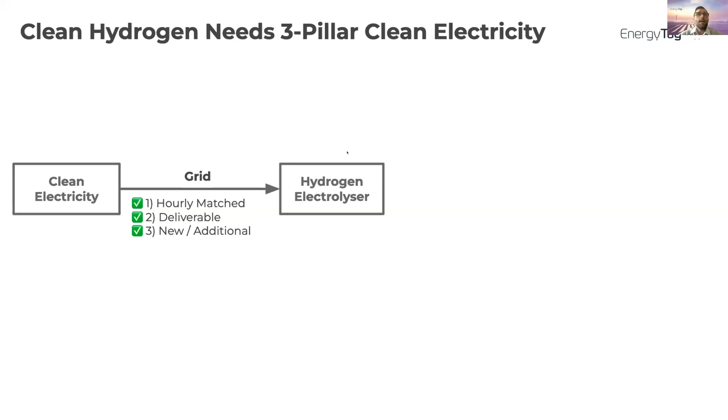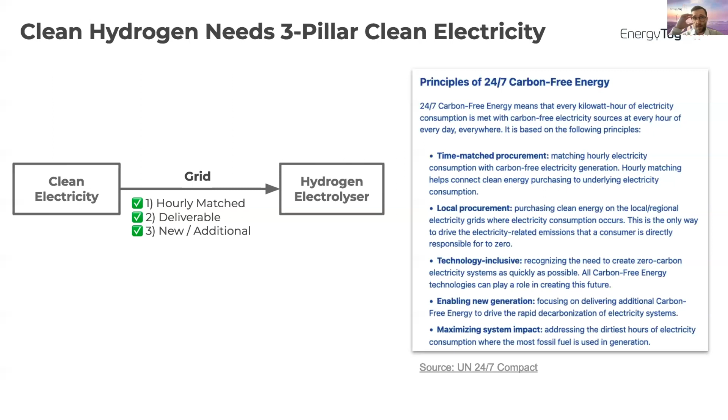First of all, as has been mentioned already, there are the three pillars: grid-connected electrolysis, hourly matching, deliverability, backed up by new or additional supply. This is obviously very much aligned with the principles of the 24/7 compact, of which Energy Tag is one of the members. This is the fundamental basis of really clean electricity when there's new load like hydrogen coming onto the grid, and the experts will cover in detail why this is important from an emissions perspective later on.

Just to give an overview of what's going on around the world, this is not just a topic in the United States. It's very much a global topic anywhere where hydrogen is going to be produced at large scale. The EU will be three-pillar hydrogen after a transition phase by 2030. All renewable hydrogen produced and imported into Europe will have to meet these three criteria, and that sets a first international standard for what it means to be truly renewable hydrogen. There is a transition phase to the hourly tracking, out to 2030.

That's a bit unfortunate, but it's for a number of reasons, including the fact that the EU's legislation for hourly tracking actually needs to be changed and amended, and that will take a bit of time. The United States has no such regulatory block. It's really important - in the US this can happen more or less today. Deviations in the United States would be more serious, as the US has no carbon price at a federal level, has less clean grids in general, and a larger subsidy for hydrogen.

A couple of points around after the European rules were announced: Hydrogen Europe, which represents the EU hydrogen industry, said the rules can be met. They're strict, but they can be met. That's in their public statements after the release of the Delegated Act.

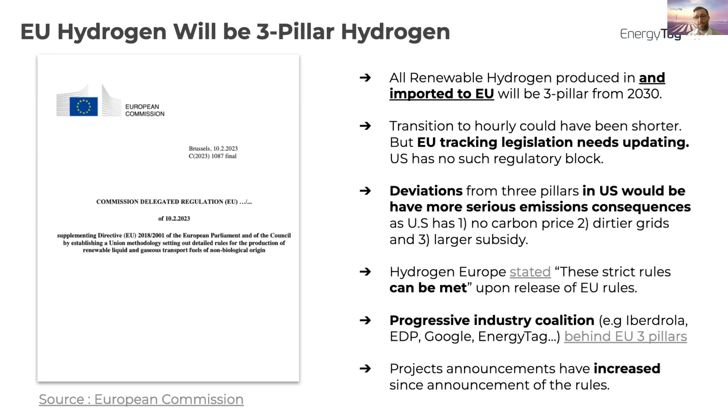We were part of helping put together a progressive industry coalition in Europe with the likes of Iberdrola, EDP, and Google, who asked for these three pillars to secure the role of hydrogen in a European energy future. Actually, project announcements have increased since the release of this delegated act, a sign that this can happen absolutely, and this can be done in practice.

Just to take a step back and more broadly, the 24/7 movement is actually something much broader than the hydrogen sector, even if that's a great initial example. Governments like the US government have a 24/7 target for their energy procurement, and the UK's hydrogen standard is requiring 24/7. Other governments around the world are implementing regulations using this approach.

Energy experts have many models out there showing this is the best way forward for grid decarbonization and defining clean energy, from the IEA, Princeton, who are here today, and TU Berlin. A number of civil society organizations have signed letters, both in the US, like the NRDC on the call today, and in the European Union, calling for 3-pillar clean hydrogen. That's a really important voice, as they want to make sure the hydrogen we produce is clean with no shortcuts taken. System operators in Europe have also called for this approach to better decarbonize our grids.

And obviously there's the compact. I don't probably need to explain that, but there's 118 companies who've signed up to the principles introduced on the last slide. Just in terms of feasibility, maybe to touch on my own experience in the sector.

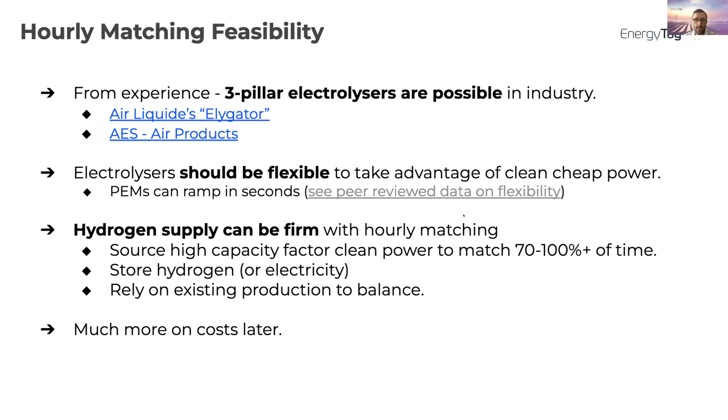So I think that's also a key point to keep in mind - we can do the tracking right. And in the US, which is more the focus of today's conversation, even if the principles apply globally, hourly RECs are required for that tracking. Renewable energy certificates are already available across the US. Providers like M-RETs and PJM GATS are already offering this service today, and therefore can offer it straight away for hydrogen as well, as long as the hourly data is provided by the production and consumption devices. EnergyTag has a voluntary standard for hourly tracking and can help harmonize approaches in the United States if required.

So that is it from me. I hope it's been a useful introduction, and I'll pass it back to Irina.

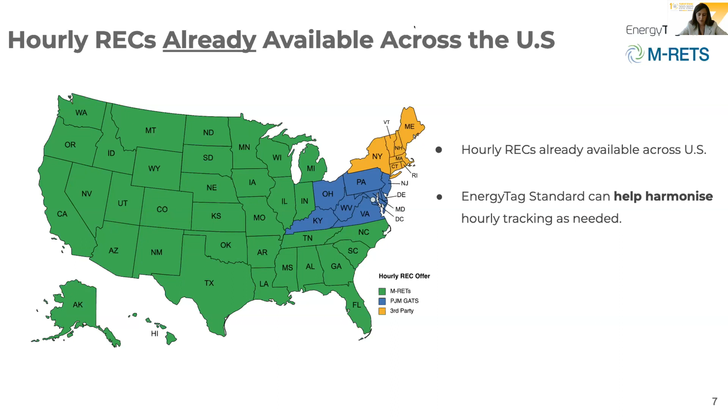Thank you very much, Kilian. Very useful indeed. I think you gave a very good overview at global level, focusing on the inclusion of the elements as we discussed in the regulatory framework, looking into feasibility and also the real possibility of tracking at an hourly basis around the globe. Thank you so much for that.

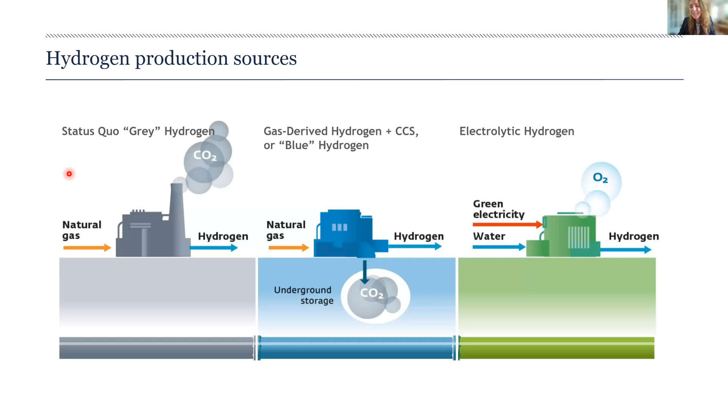And as we'll cover, this can actually be far dirtier than this without any strong regulations around how it's produced.

So this is where the clean hydrogen tax credit comes in. This was part of the Inflation Reduction Act, which passed Congress in the US in August. This is the largest climate bill in US history, offering roughly $400 billion in support and subsidies for clean energy solutions, set to take us much closer to our US climate goals now that it's passed. Hydrogen was very well taken care of in this policy, and the clean hydrogen tax credit is one of the larger subsidies in that package.

It is based on the greenhouse gas emissions of hydrogen production, meant to subsidize two pathways: electrolytic, based on water, and the carbon capture one, which is blue hydrogen. Those are the emissions of today's status quo gas-derived hydrogen. As long as a project is 60% or more cleaner than today's hydrogen, they start getting subsidized by receiving a tax credit for every kilogram of hydrogen produced. The cleaner a hydrogen project is, the higher the subsidy.

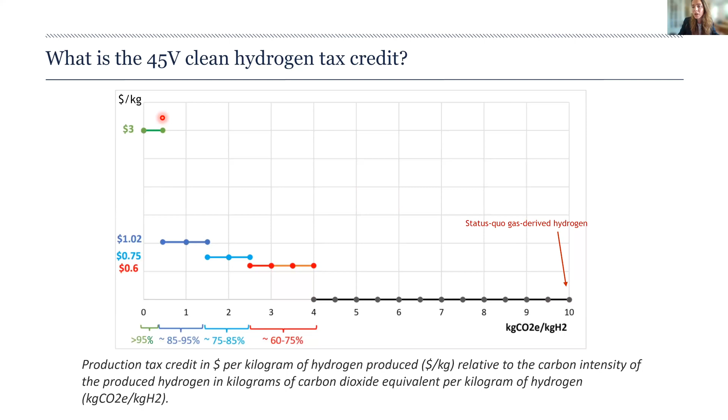The top prize is the $3 per kilogram subsidy, only eligible for very, very clean projects, 95% or more cleaner than today's hydrogen. You can see that jump from roughly 94% to 95% or more. This is exactly what Congress wanted—to subsidize those truly very clean projects, because those are the only ones really aligned with climate goals. This is a substantial subsidy and it's very long-lived.

First of all, it's uncapped, so there's no limit to how big it can be. It can be more than $100 billion over its lifetime, if not more. Just to give you a sense of what that means for one project: there's a big project in Texas being announced to produce hydrogen from water and electricity. This project alone would be eligible for $3 billion of subsidies from the federal government. This is enormous as one subsidy for one project.

It's very long-lived—eligible for projects that commence construction as far as 2032, and it lasts for 10 years, which means that you can still have hydrogen projects by 2045 still being subsidized by this bill.

As I mentioned, the implications really hinge on how the US federal agencies—Treasury being in the driver's seat, but also supported by the Department of Energy, the Environmental Protection Agency, and the White House—will implement this credit. Because the credit is tied to the greenhouse gas emissions of hydrogen production, Treasury is tasked to determine a methodology or issue guidance for calculating the life cycle greenhouse gas emissions of hydrogen within 1 year of the passage of the IRA. All federal agencies are closely engaged with Treasury considering the complexity of the issue.

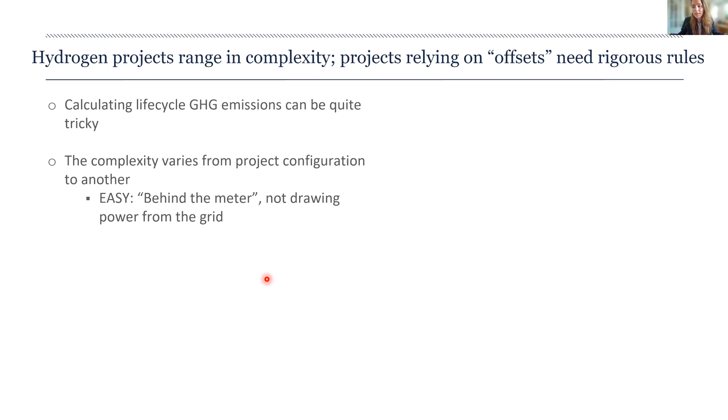I will briefly touch on the crux of the fight in terms of complexity, but Wilson and Dan will cover this more rigorously. The complexity of calculating greenhouse gas emissions varies by project configuration. If you have a hydrogen project that's not connected to the grid, only connected to a wind or solar farm producing hydrogen on site, that's easy—that clearly has zero emissions. However, it gets much more complicated for projects connected to the grid, drawing a lot of grid power that is still very fossil heavy in the US.

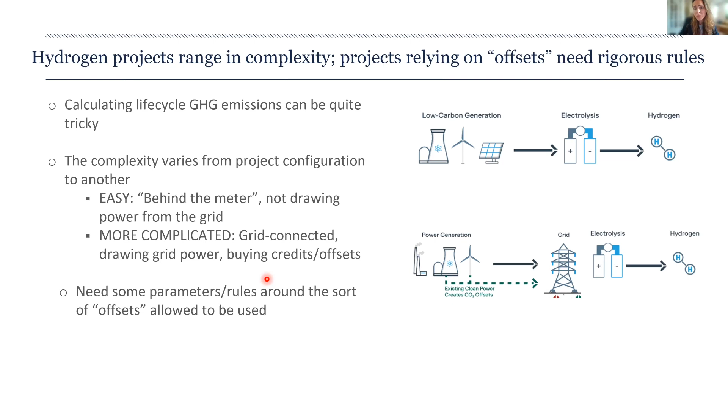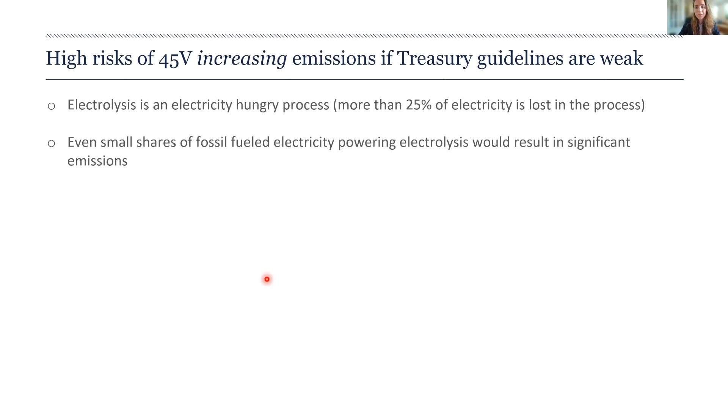So producing a lot of emissions and just purchasing credits or offsets to net out those emissions. As many of you probably know, offsets are a very tricky topic because it's very hard to make sure they're actually effective at reducing emissions. So we need some parameters, conditions, or rules around the sort of offsets allowed to be used to claim the credit—this is where the pillars come in. This is especially true for electrolysis, which is a very electricity hungry process. More than 25% of electricity is lost to produce hydrogen, meaning even very small shares of fossil fuels in the electricity used to power the electrolyzer can result in very significant emissions.

Just to give you a sense of how perverse an impact we may have if the rules aren't strict enough, this graph shows the carbon intensity of various hydrogen projects. This is where status quo hydrogen is today. This is hydrogen produced from water but powered by today's US average grid - it's twice as bad. This is electrolytic hydrogen powered by coal electricity, four times as bad.

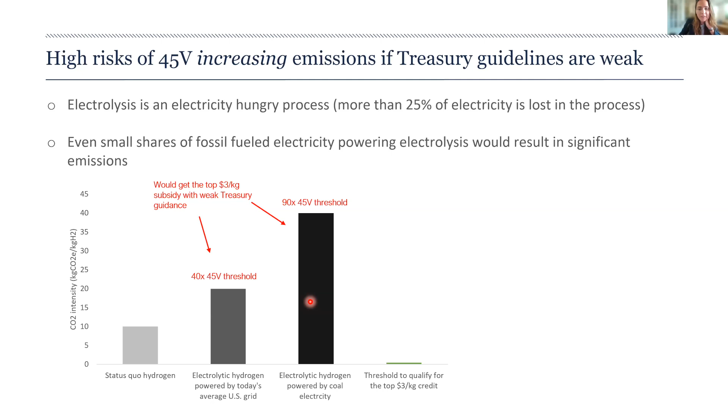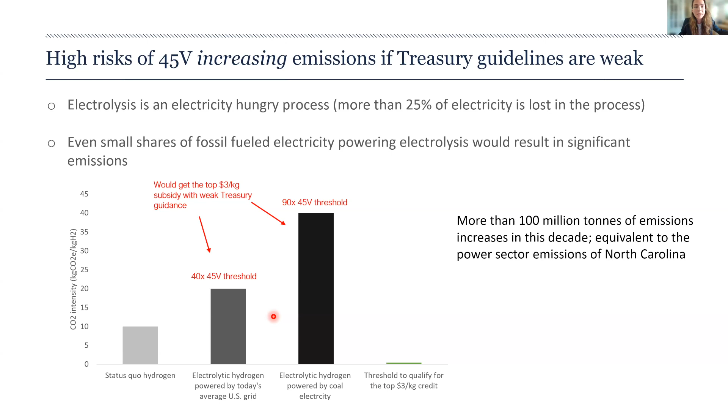That is the threshold to qualify for the top subsidy. Both of those can actually receive the subsidy if Treasury rules are weak and don't rely on the pillars. So we can have a very perverse effect where the US taxpayer is subsidizing projects worse than status quo, and this will result in a lot of emissions total, more than 100 million metric tons. We've seen much higher estimates.

And again, this is where the three pillars come in. They're the parameters, conditions around those offsets to make sure that hydrogen emissions being produced are actually effectively being netted out. As Wilson and Dan will describe, this is the only system that ensures truly clean hydrogen as the IRA intended.

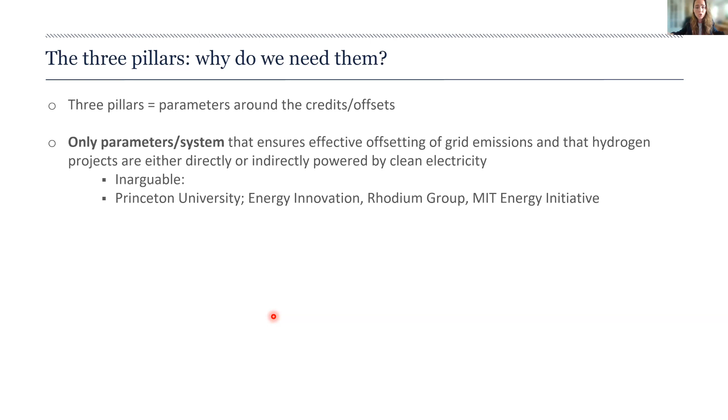I will not go into this too much, but I love including it because NRDC is primarily a lawyers-heavy organization, and they produced an excellent legal explanation of why the three pillars are necessary to meet IRA requirements. I'll describe it simply: the IRA defines clean hydrogen by accounting for the impacts it will have on the system. So if a hydrogen project spurs fossil fuels on the system via weak Treasury rules, then those emissions have to be accounted for. And since the three pillars are the only system that will enable emissions to be truly very low, then they're legally necessary to meet IRA requirements, the way the IRA defines the boundaries.

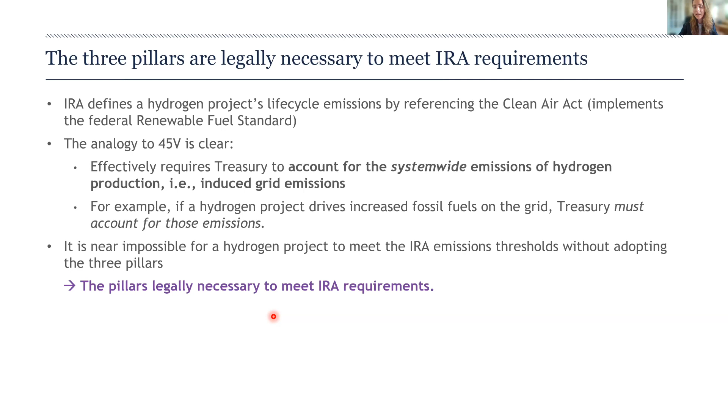So we're happy to chat more about that, but I will skip it.

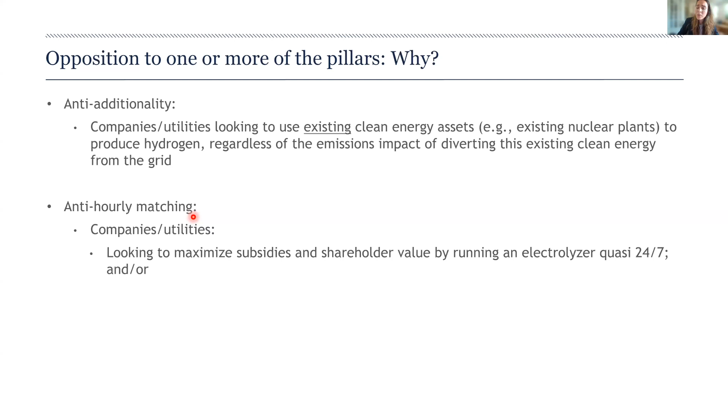On the grid, we have the anti-hourly matching companies, largely companies either looking to maximize subsidies and profits by running their electrolyzer quasi 24/7, which may not happen under hourly matching since you're more tied to the generation of renewable energy - and you're all fairly aware of that in this compact - or have a business model or are located in a region where hourly matching may not pencil out at today's electrolyzer costs. The question that really needs to be raised is: is the intent of a tax credit to make this work for everyone, everywhere, regardless of whether that's aligned with our climate goals, or is it meant to support the industry sufficiently to make it more widespread and let the market take it from there?

And this is the crux of the fight here.

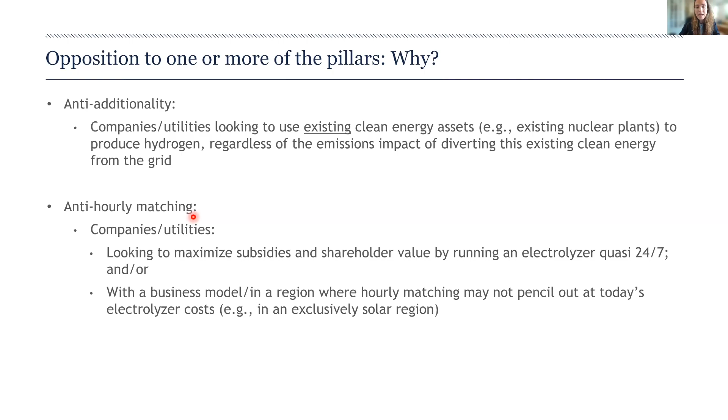That was very comprehensive and I think very well explained. You start with additionality and the other two principles, explaining why this is the only system of guardrails that will make sure this won't become an actual problem for the climate, which I think is what we're all hoping for. But you also gave a very good overview of the landscape of the different stakeholders. As we said before, there are not only those that are pro, but also a lot of people that are anti, the three pillars, although I understand this is changing and there are some movements between one group and the other. And then also explaining very well to the audience why there is opposition. I think this gave a very good overview. Thank you very much, Rachel.

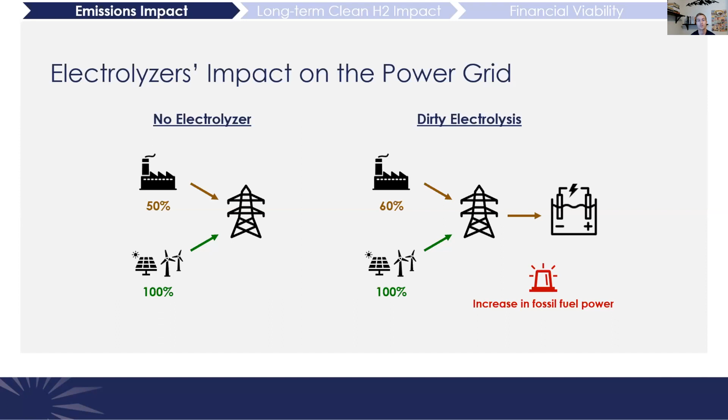So let's start with the emissions impact. As a simple example, let's consider what happens when you connect an electrolyzer to the grid and buy clean energy from existing facilities to match your annual demand. Even though you're claiming the use of this clean energy, in reality, the grid is responding by calling on fossil fuel power plants to ramp up. And why might this be?

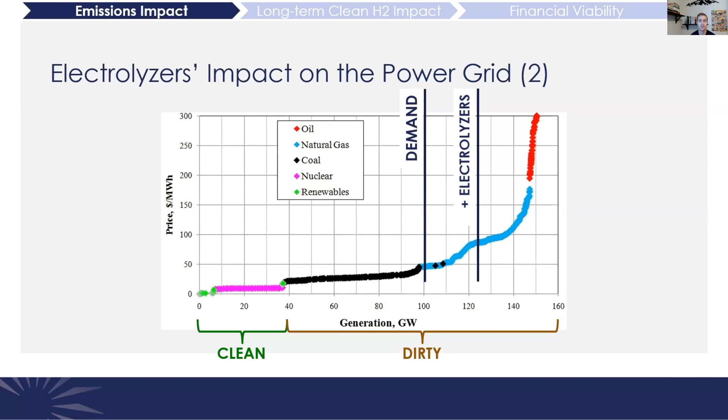Well, power grids meet demand by calling on the cheapest available resources. Clean energy generally runs as often as it's available, and wind and solar are free, and nuclear fuel is pretty cheap. So fossil fuels are next in line to serve that new demand caused by electrolyzers. But unlike other clean energy technologies like electric vehicles and heat pumps, electrolyzers are very energy intensive. If they cause fossil fuel power plants to ramp up, they would make emissions as much as 5 times worse than how we make hydrogen today.

You can see how these emissions are extremely far above what's needed to earn the $3 a kilogram tax credit. We also ran a more nuanced analysis by region using today's grid mix in the US, and emissions from electrolysis would be 2 to 4 times as bad as today's processes everywhere in the US without the right rules in place.

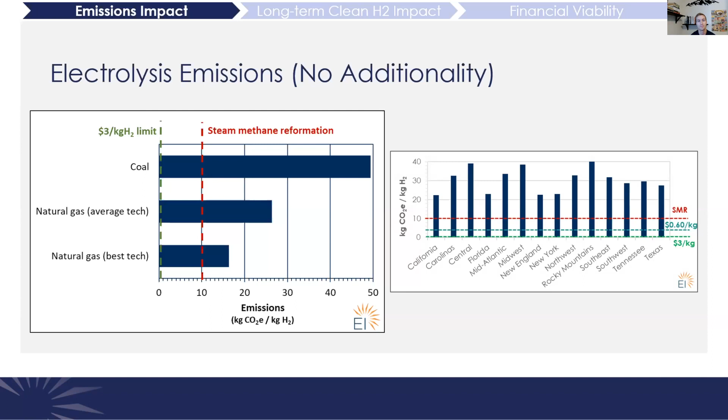Luckily, Treasury can set rules that ensure electrolyzers are making truly zero carbon hydrogen. Again, as Rachel and Killian covered, this requires drawing power from new sources of clean energy that can physically deliver their power at the same time that electrolyzers are operating. I only covered the new piece here, but the other two components are also essential pieces of this puzzle to keep emissions in check. And I believe Wilson is going to cover that in a little bit more detail in his presentation.

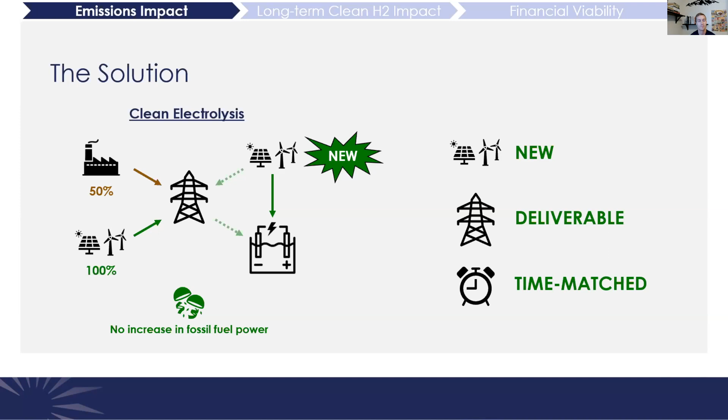So moving on, another thing we hear is that we just need to sacrifice these near-term emissions as a trade-off to grow the hydrogen industry, which will clean itself up with time as the grid decarbonizes. Because after all, we will need lots of clean hydrogen to meet our net zero economy goals.

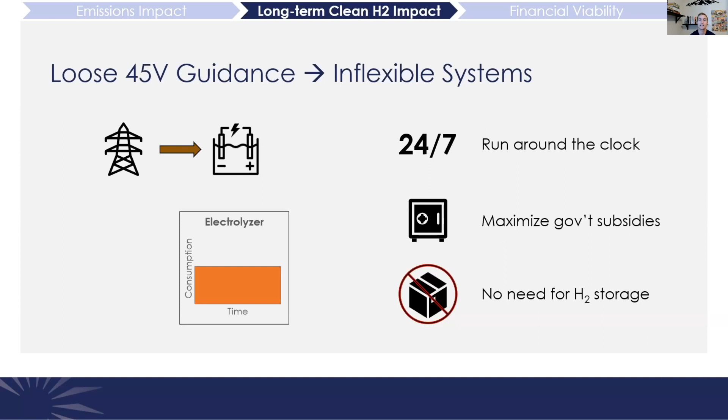But we're looking at two potential futures here. If we forego time matching in our 45V rules, we'd see developers build cheap but inflexible electrolyzers that can run nonstop. They'd earn a ton in government subsidies and deliver steady hydrogen to off-takers, but without needing much, if any, midstream infrastructure.

If we instead had all three pillars, we'd see developers build higher cost but more flexible systems that can follow changes in renewable energy output. They'd get fewer government subsidies, and they'd need hydrogen storage or maybe pipeline systems to smooth those gaps in production.

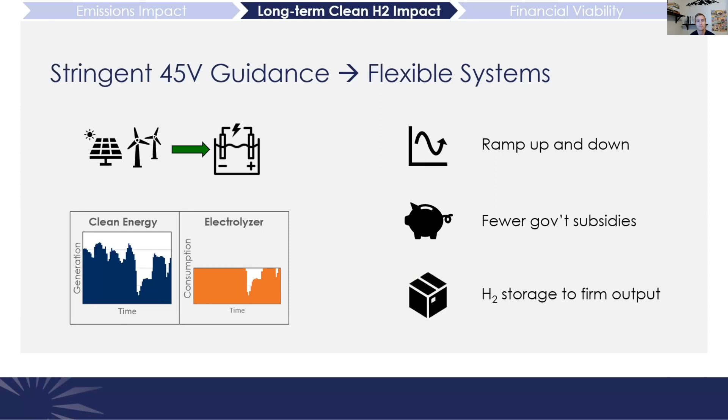But an inflexible industry built under loose rules would be in a lot of trouble. Electrolyzers would run nonstop while subsidized. So in this example, they would be incentivized to buy power in all hours, given the value of the $3 a kilogram tax credit and the $1 a kilogram sales price.

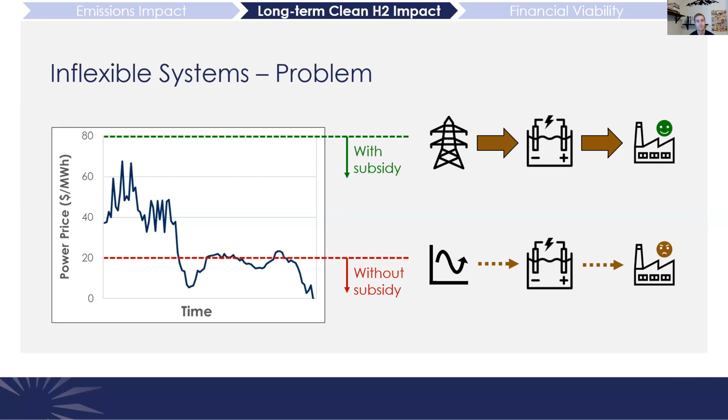And this could cause a lot of trouble for the industry. So the expiration of tax credits could cause stranded assets and lost jobs where projects weren't set up for long-term success. Or we might see Congress extend tax credits and kick the can down the road for another 5 to 10 years. But you can't really avoid the need to build a flexible system if you're going to stay profitable as an industry long-term.

So by contrast, stringent tax credit guidance would align incentives with the desired policy outcome that we want. If you build an industry around flexibility where electrolyzers run in a manner that allows for sustained operations and growth after those tax credits expire, you'd be setting yourself up for success.

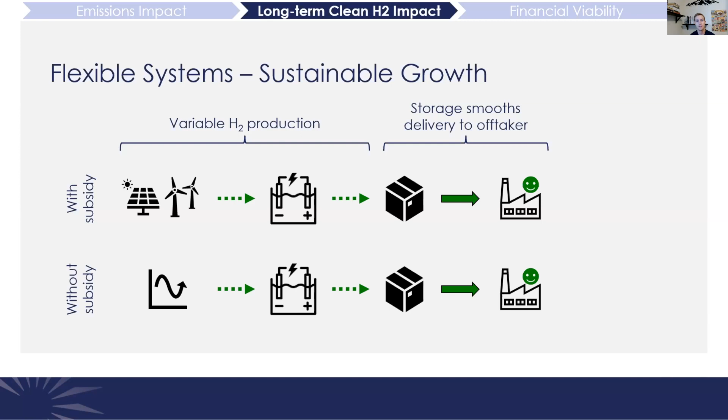So in this example, projects are initially built to follow renewable energy output, and electrolyzers would be overbuilt such that they put extra hydrogen into storage in some hours, and then those off-takers pull hydrogen out of storage in other hours. And then when the subsidy expires, you can have new and old electrolyzers alike that could price hunt for that cheap power on the open market and still be able to operate in that more flexible manner.

And we're also going to need a lot of flexible demands like electrolyzers to help clean the power grid. So in a world after the subsidies, flexible electrolyzers will need to ramp up and soak up and make use of that excess renewable energy, which is indicated by very low or even negative power prices. And then they can shut down when that power is needed elsewhere, which is signaled by higher power prices that come from the use of fossil power.

So lastly, our analysis looked at the financial viability of projects complying with the 3 pillars, and we found that they'd be profitable from day one in much of the US. So to understand this analysis, it's helpful to think of 3 types of project configurations.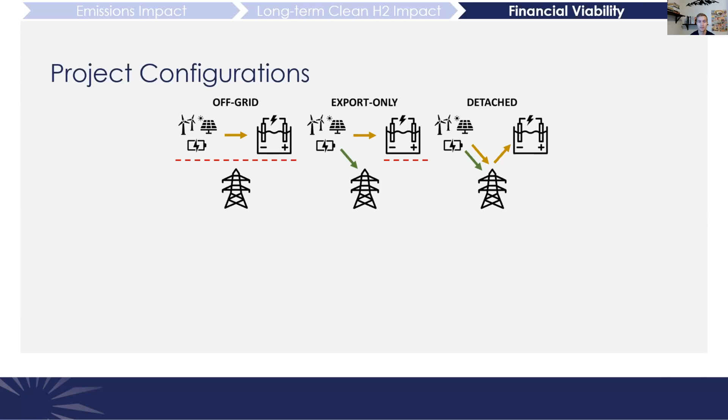The second type connects this arrangement to the grid, and you can export your excess clean power to the grid or even turn off your electrolyzer and sell all the power to the grid when it's really valuable, but you can't pull from the grid to power your electrolyzer. So by being connected, you can earn a lot more revenue from monetizing the clean power more readily.

And then the third type detaches the electrolyzer from the clean power with the 2 connected only through the grid. And so whereas the first 2 configurations are clearly compliant with the 3 pillars, this type has to do more work to prove compliance. But it is helpful to have the option to site clean power where there's cheap land and good wind quality and site your electrolyzer next to the off-taker.

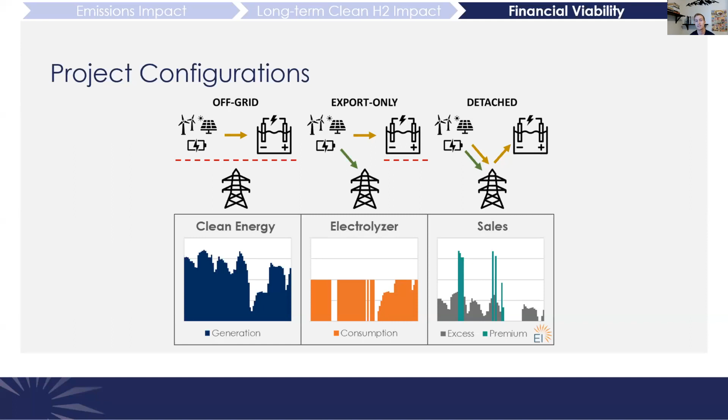So for our analysis, we looked at export-only projects to be conservative and keep things simple. And we tested 3 locations: West Texas, which has great wind and solar and a lot of land; Houston and Southeast Texas, which has good solar, decent wind, and is sited near petrochemical industries; and West Minnesota, which has good winds, mediocre solar, and is in agriculture country where hydrogen could make ammonia.

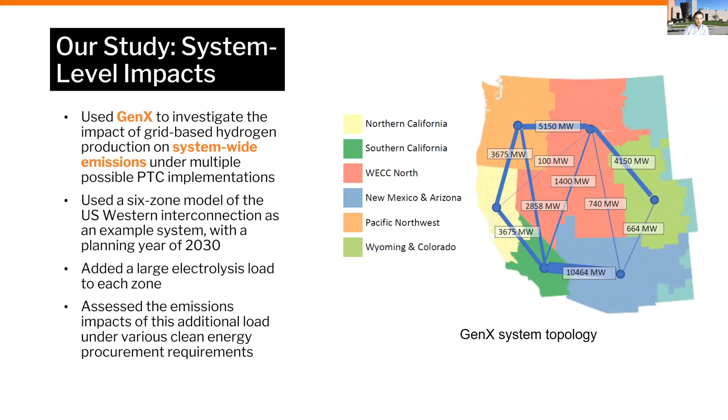So I'm just going to cover each of the three pillars one by one and show the results from our study of what happens when you get rid of them.

I think the first thing to note is that under a no requirements case, if we add hydrogen production to the system without making clean electricity procurements, we end up with emissions impacts far greater than if we had made that same hydrogen through conventional steam methane reforming, which is exactly what Dan, Rachel, and Killian all touched on. What's interesting is that just buying annual matched renewable energy certificates, a standard way of showing clean electricity procurement today, actually has zero impact on this consequential outcome. Under our annual matching case, where we have two of the three pillars, deliverability and additionality, if we get rid of hourly matching, we end up not making any impact at all.

However, when we do have hourly matching and all three pillars working together, we see emissions outcomes that are actually aligned with the statutory requirements of the tax credit, producing hydrogen which does not result in any additional emissions in the system. I should also note that the incremental cost of implementing these three pillars, as opposed to not doing anything at all or just implementing annual matching, is not very significant.

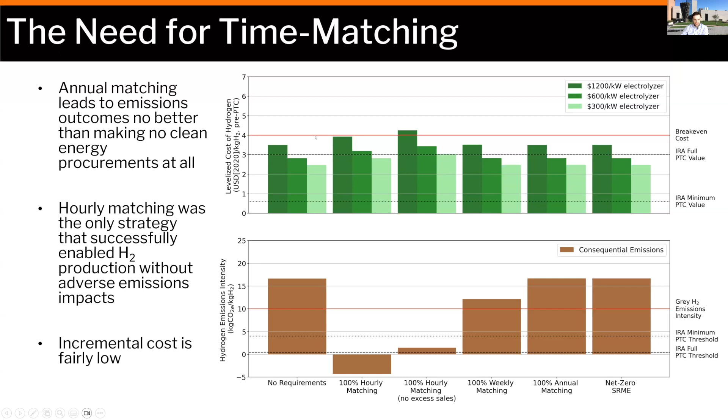In terms of deliverability, we also modeled cases where, rather than requiring hydrogen production in the same grid region as the electricity it claims to use, we allow claiming of matching electricity over much larger geographic distances subject to grid transmission constraints. We see that we fail to avoid significant emissions outcomes. On the left side here, we look at an electrolyzer located in our Wyoming and Colorado zone, powered by local solar.

And then an electrolyzer located in Northern California, also powered by local solar. In both those cases, we see emissions outcomes that are below the threshold for the PTC.

And then finally, a case where we allow an electrolyzer in Wyoming to use solar power located in California, and the emissions impacts are significant. This is because when congestion prevents the resources you're claiming to match from actually delivering power, you end up relying on local fossil resources instead, and the power you claim you're using ends up just displacing other clean power in the areas where it's being generated.

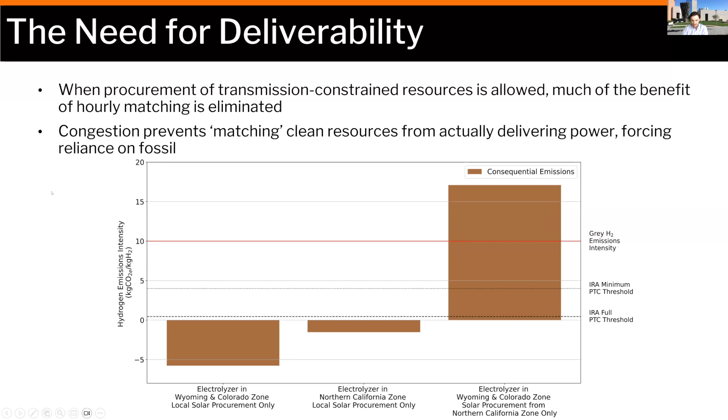And the final pillar, additionality or new power. This one is fairly intuitive, but we basically showed that if you allow existing clean resources to qualify for the 45V tax credit, then because you're adding demand to the system from hydrogen but not adding any new supply, the new power has to come from somewhere. And where it comes from is the exact same resources it would have come from had you not made any quote-unquote procurements at all.

I'm now going to switch gears and look at a kind of meta-analysis of the cost of the three pillars, comparing a range of studies that have come out recently attacking exactly this topic. As Rachel noted, some of the opposition to the three pillars comes from those who argue that they are expensive and that they would harm scale-up of the hydrogen industry. The purpose of this study is to assess all of the various analyses that have assessed the cost of the three pillars and explore why they come to different conclusions.

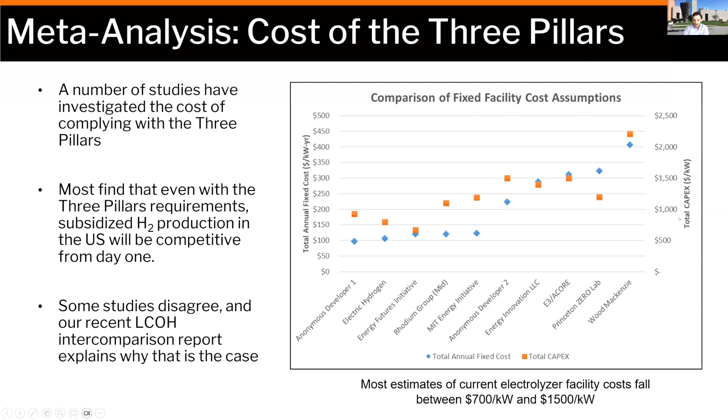When these kinds of operations are allowed, you end up with very high utilization rates, even for projects requiring the three pillars, which is really the major complaint of opponents—that they force you to operate significantly less often. I'll note that the other study that found very high costs for hourly matching was the Rhodium study, which assumed a solar-only system that had to operate a 100 megawatt electrolyzer with a 100 megawatt solar facility, leading to extremely low utilization rates, which is not a realistic project design compared to these ones that are actually optimized to the task.

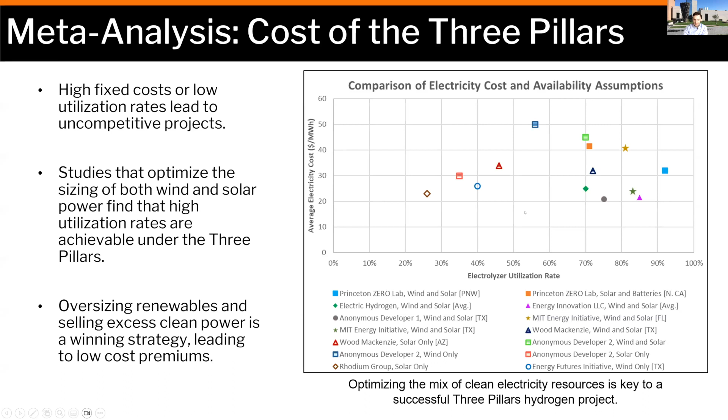Finally, I'm going to show a couple plots of how the levelized cost of hydrogen is affected by these studies. This plot shows the different electricity cost and utilization rates from each study for a given electrolyzer cost—$1750 per kilowatt. This is the very most conservative cost cited by the DOE for small electrolyzer projects today. You can see that even at this very high cost, you still have hourly matched projects all being competitive when optimized in this way, as, as Dan said, likely located in places with decent wind and solar power.

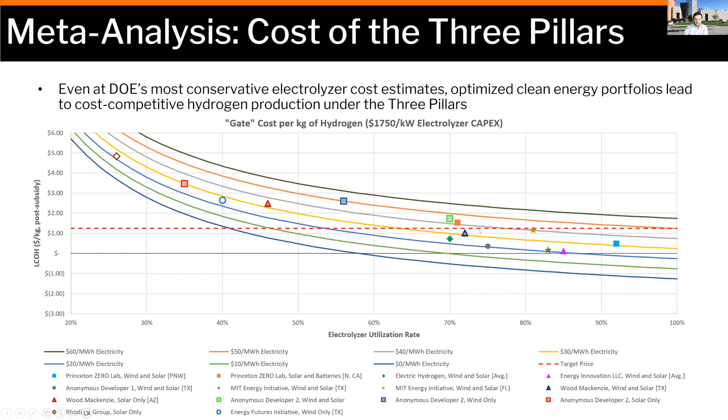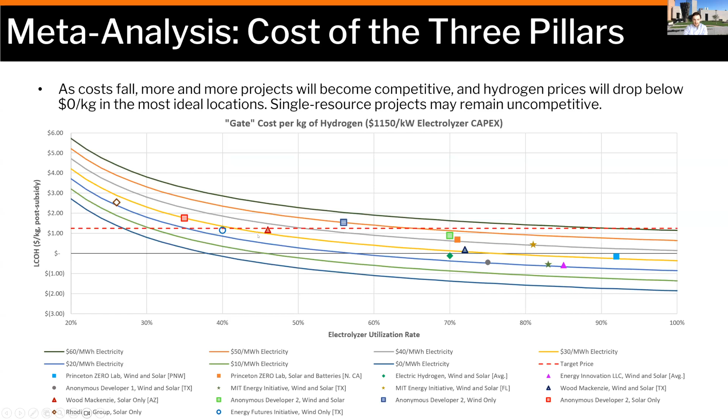But as you move down the electrolyzer cost curve, as these subsidies are designed to do by subsidizing early projects, which then expand manufacturing and reduce electrolyzer costs, you can see that gradually projects relying on only single renewables, and eventually projects essentially anywhere—even Rhodium's very conservative solar-only project—become significantly profitable. The overall impact of utilization rate, you can see these lines are a lot flatter, is much lower, which means geographic differences in the cost of producing clean hydrogen are reduced, and we can expect to see it be profitable nationwide.

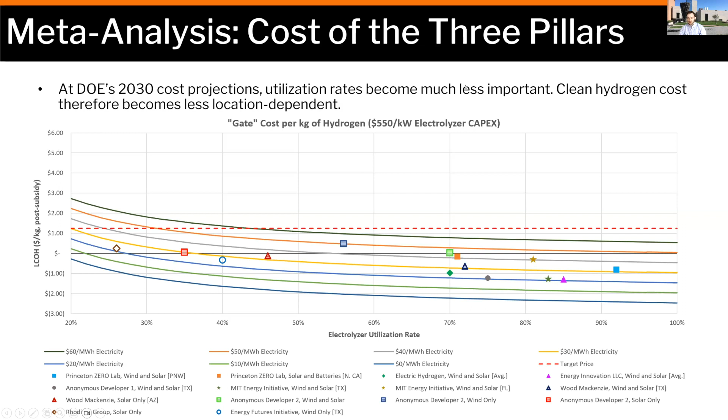So that's just a rapid fire summary of some of our recent analysis. Happy to pass it back to you, Irina, and answer any questions the audience has.